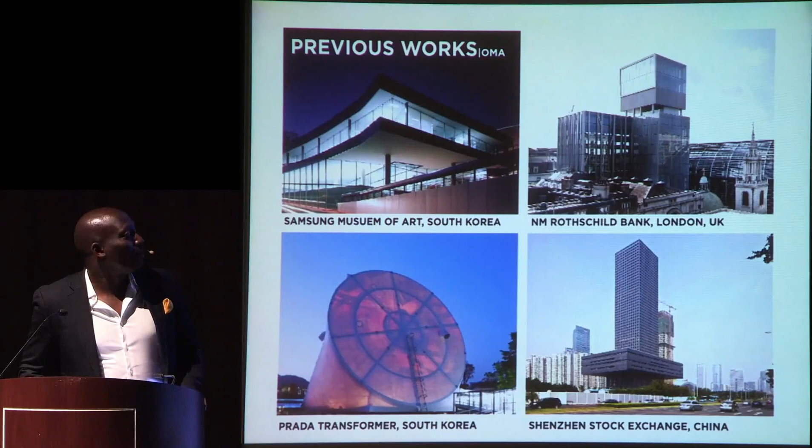And I think the home is a fundamental building block of every society, and so that's really what NLÉ is about. Before I started NLÉ, which was 5 years ago, I had the great opportunity to work on different projects, what I would call super sexy projects, all over the world, an incredible experience that I've been very grateful for.

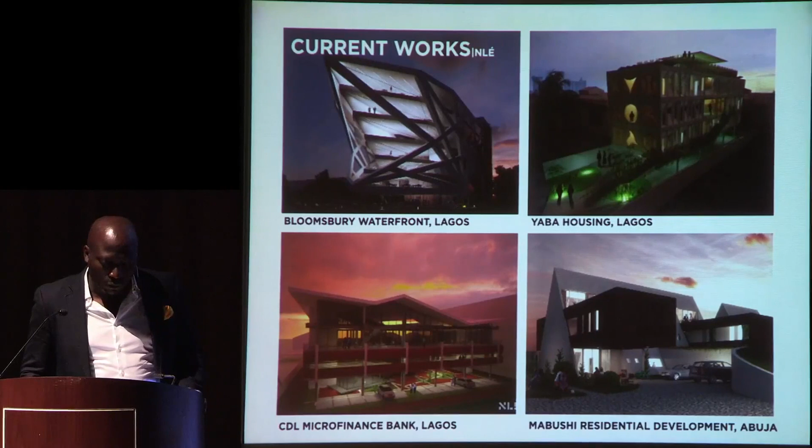At NLÉ, we continue to do super sexy projects. We're doing big buildings, fairly large-scale buildings in different parts of the city. But we are also very interested in a new breed of work, which I call the super sexy, serious projects. And I will show you some of those, 3 specifically.

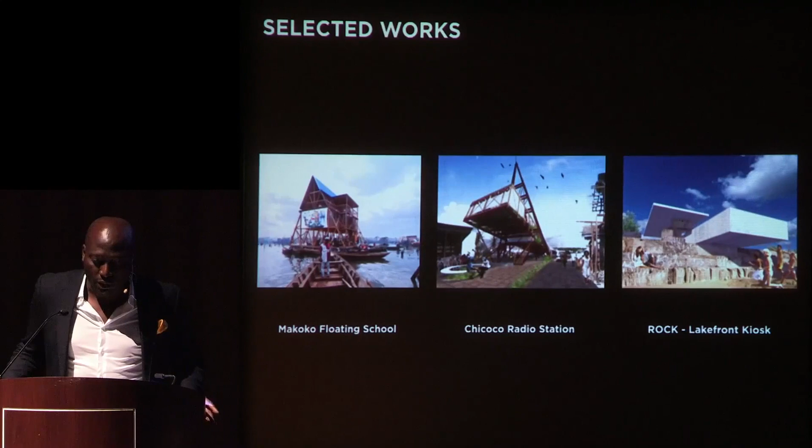The first is Makoko Floating School, which perhaps a lot of you know of. The second is Chicoco Radio, which is a radio station in Port Harcourt. And the final project is Rock in Chicago here. All of these projects, and the others we work on, exemplify a bit more of what we are and where our focus is.

It's about sustainable development, and not in terms of the checklist of sustainability that we all know from all those credit lists, but really about responsibility, and that sustainability is about meeting the needs of the present without compromising the ability of future generations to meet their own needs. I think it's a very eloquently articulated definition,

which is really just about responsibility. It's about economy of means, it's about a lot of things, and if you embody that in your work, in day-to-day life, then you'd be practicing sustainability at its core.

Like I started, I think urbanization is actually one of the great challenges of our time, and at the same time also a huge opportunity. We know now that more than half of the world's population live in cities, and it's said that by 2050, nearly 70% of the world population will live in cities. What we're beginning to see is that kind of agglomeration of people happening around the African continent, some of it in Asia.

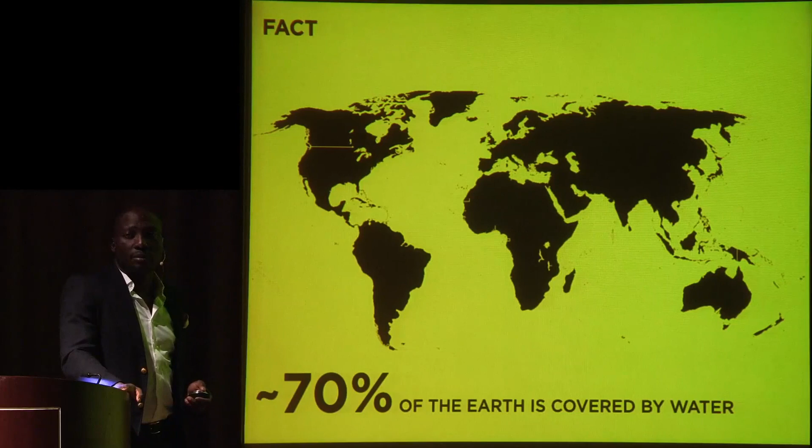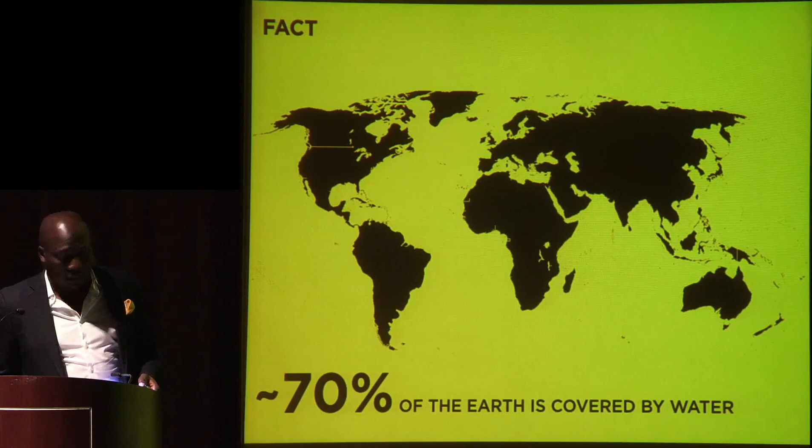But what's of course a fact is that the territory we're all struggling to occupy, these land masses, only covers about 30%. So 70% of the earth is actually covered by water. It's kind of interesting to know that we're only living on 30%, which is even far less because of the regions that are accessible. And what's even more interesting is that nearly 70% of the world's capital cities, the large cities that are rapidly expanding, are by water.

But more specifically, we found out that in Africa, where there's a lot of urbanization happening, again, nearly 70% of the African capitals are by water. So at this point, I actually thought I should write a book called Architecture for the 70%.

So it's no surprise that most of the cities are around water, because of course the cradle of civilization in Mesopotamia is a settlement on water. Water is a natural resource; you need it for agriculture, for transportation, etc. So that really is the basis, that there's a natural relationship between water and cities and humanity. But yet we seem to live on land and not turned into fish. It's quite surprising. But we will see some of that happening soon.

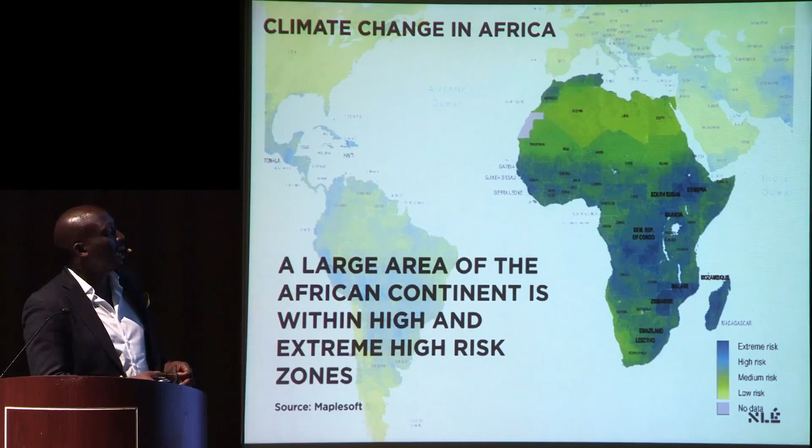So one of the first projects I would show, of course, is set in Africa's second largest city, in Africa's largest nation, and the world's largest black nation, Nigeria. And the growth of Lagos has escalated a lot in the last few years. It's currently 16 million people, and it's projected to be over 24 million in a few years. So it's quite interesting that you see the trend of growth in African cities.

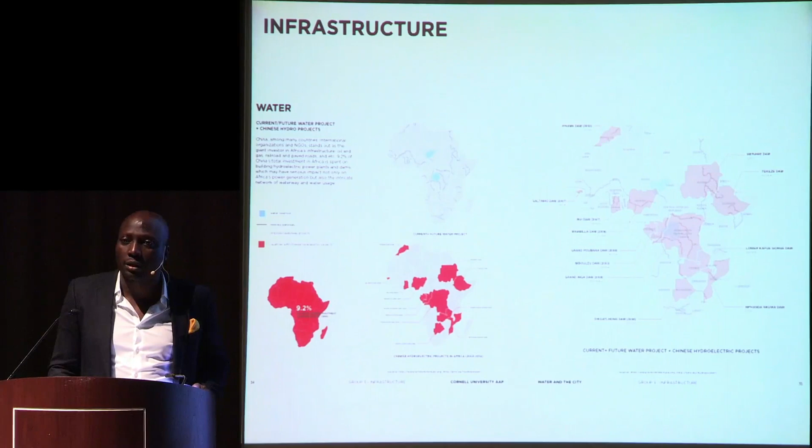Morphology of the city: where you have highlands, lowlands, where you have waterways, the kinds of constraints that prevent cities from developing, which in a way almost produces a predictable result. Cities almost grow organically if you look at them from a very macro scale in terms of their morphology.

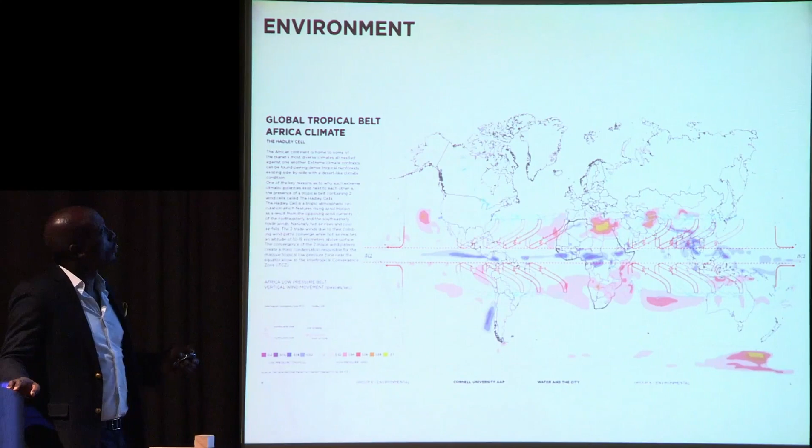The environment was quite interesting. Of course, one thing we know is that one of the most important parts of the globe is the tropical zone, the tropical belt, and that part is where there's a high degree of biodiversity and climate and rich resources. And Africa, of course, happens to have the largest area of the tropical zone of all the continents. And one of the things that we are beginning to realize is there's a shift in the intertropical belt. I'll get into that in more detail.

Resources, finally: a lot of emphasis has been placed on oil as a resource, and it's no news now the impact of consumption of oil and the trade and how that also has a direct impact on climate change.

So the result of that was really, first of all, an identification of what we call the top 20 African water cities. And these are cities that we identified as the points of convergence of issues of urbanization and climate change. So where are the cities that are growing rapidly and also most vulnerable to climate change? And these cities are points that we're now researching.

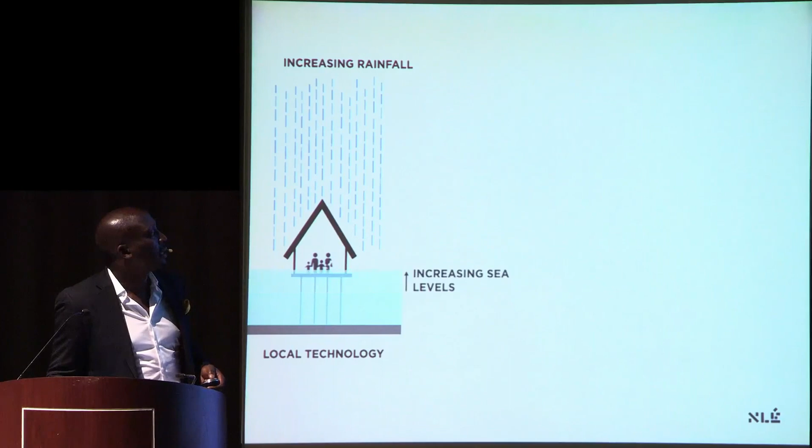But the soil condition is really poor, so once in a while, the buildings are sort of falling apart. And on the other hand, because of the increase in rainfall due to climate change, the houses get flooded from time to time. So we devised a solution that was, I would say, sort of a global solution that wasn't really an invention, but something that would adapt to the changing conditions.

And we decided to use almost everything about how they build, understanding exactly the materials, the techniques, and create a whole different structure that would work with the flotation device, essentially a hybrid solution of local and global technology.

While we were thinking of how to get the building floating, I saw these kids actually solving that problem. They've been doing it for years; literally anything they could find, they would use as flotation devices. And it occurred to me: hey, wait a minute, we're in Lagos, and they've got tons of barrels that are recycled because it's a port city. And the community also logs wood and brings it in, right within the community. It's a sawing community. So why don't we just use the local material, literally within 50 meters?

So we strapped a few of them together, and the kids jumped on it, and that was an indication of success. I couldn't even stand on it, but it's very interesting that their balance and adaptation to the environment is really peculiar, but once you get the hang of it, it's absolutely fun.

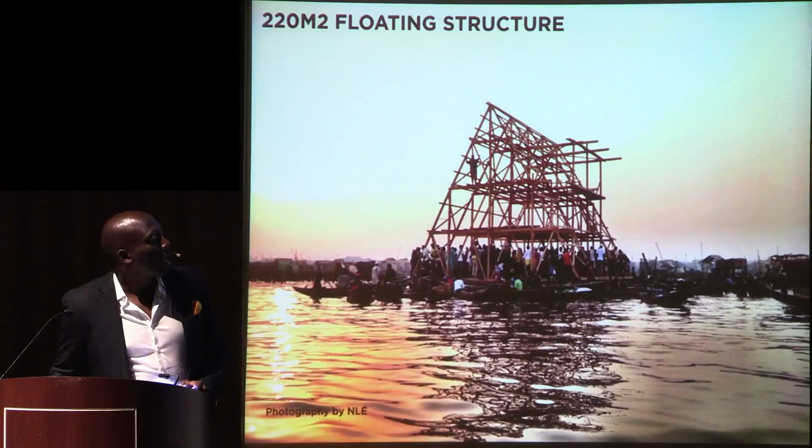So we strapped 16 of those together, multiplied that, and created sort of 220 square meters of floating real estate, and extended that into the structure using the wood, which again became their sort of party venue. And that's the structure there. I'll just go through very quickly.

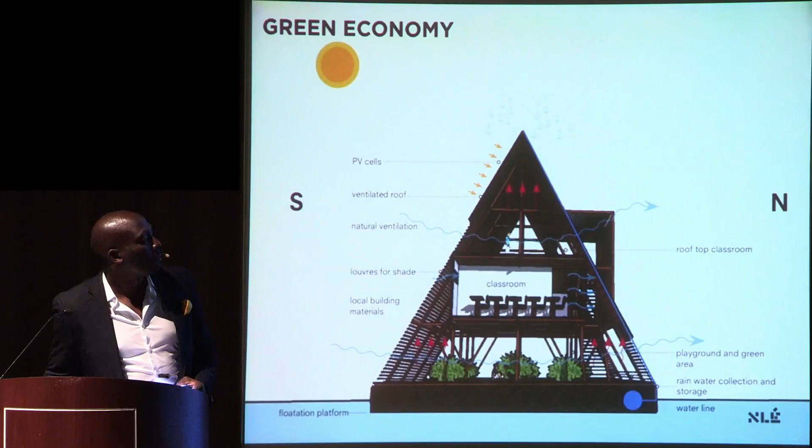I like to say it's a building that is really far from perfect, but actually makes everything around it perfect. It leaks, like most great architecture. It's become an interesting landmark for the community. It's the highest point where you see the whole city. It's the first 3-story building.

In itself, it's not like we've really invented anything new. Floating houses have been built all over the world. But the ability to think about the resources locally available, and the fact that this structure, not quite a house and not quite a boat, is 3 floors, 220 square meters, built out of local materials by 8 unskilled carpenters from the community, using nothing more complicated than a hand drill, I think is perhaps remarkable.

So the impact, of course, we've provided a space for the community, but one of the most important things is that due to the global interest and international attention it's received, there's a lot of visibility and media attention, and we thank all the press people. The ability for the world to appreciate the work has also had a sort of catalytic effect.

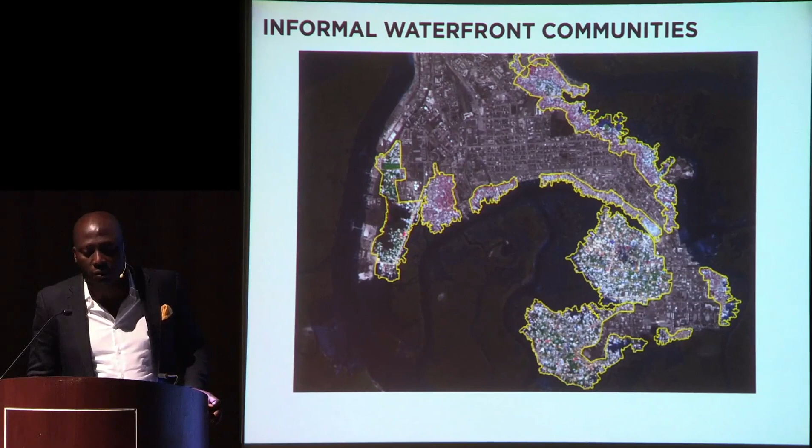The people are well educated and experts, but they also live in informal settlements called Okrika Waterfront. And a few years ago, some of the settlements were demolished by the government with this pressure of urbanization, that we need to develop, we need to create new places, new spaces.

I'll go very quickly. It's also a culture that is about water, but they're a very different culture in terms of they don't really live on water, they live by water. And I'll show you a video very quickly. This video sort of demonstrates.

You see this place where they are? Now water before. Where our papa them come down and fisher people. They can't carry this mud, big mud, come stone here. As you see this house, it's deep inside the ground. All here now money they take by, all here now mangrove. Then cut them. This place where you see so. Now here they born me. Now here my mama and my papa marry stay born me. And here she died. We carry her go that way, go bury her. As you see me, I done it 56 years. These 56 years where I did so, I never go any other place. Now here, even another town, I never go, not any place. Me, I'm from this place. So these are some of the community members. I don't know whether they want push us to the way here. We don't know. If they want carry us to the way, we don't know where to go. Me and my picking them.

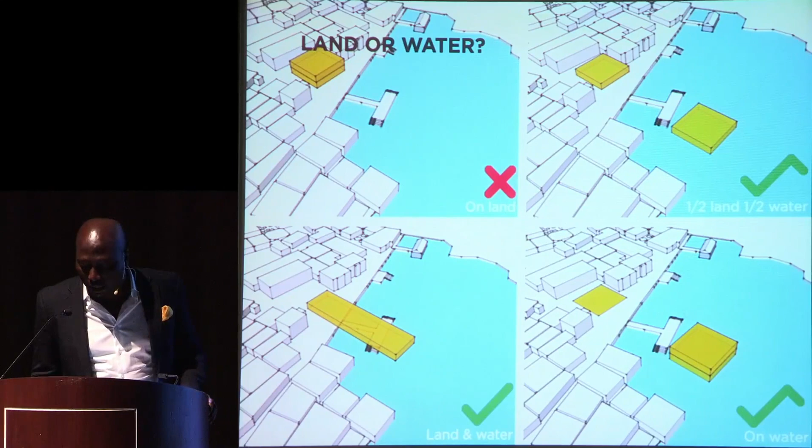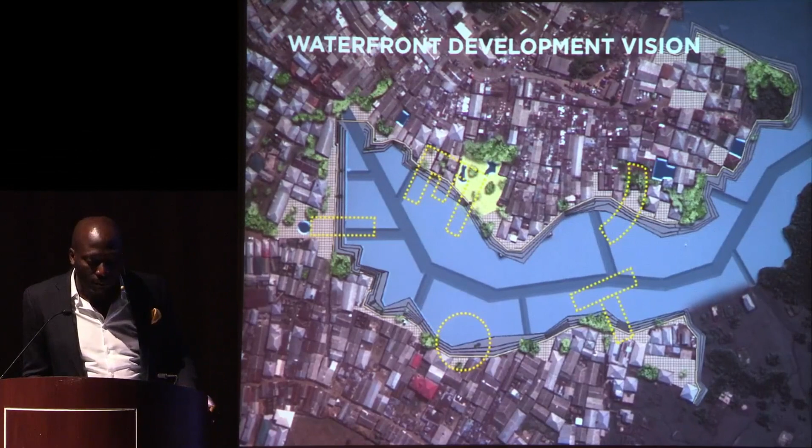So it immediately became a project that was more of an amphibious structure, partly on water and partly on land. And the thought was, why don't we use this as a model for urbanizing their waterfronts, where you create public spaces all around the edges and freeze the edge to make it a public platform.

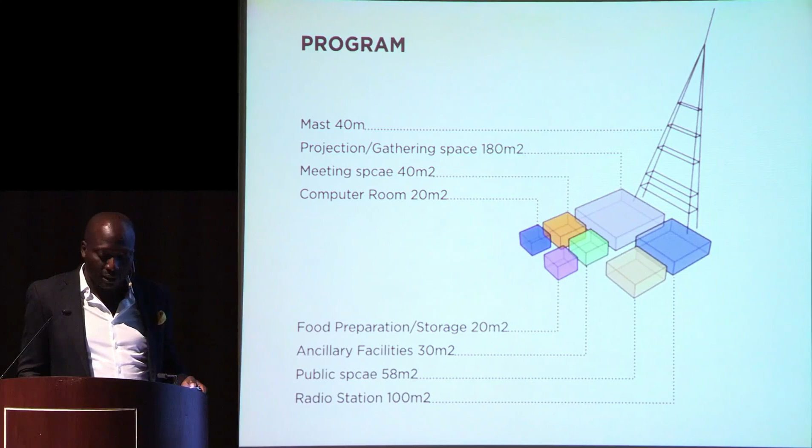So we looked at the program very quickly. We developed it with them and with CMAP, and part of the program was to also build a 40-meter mast. And we decided to organize the program in a linear way to match this relationship between land and water.

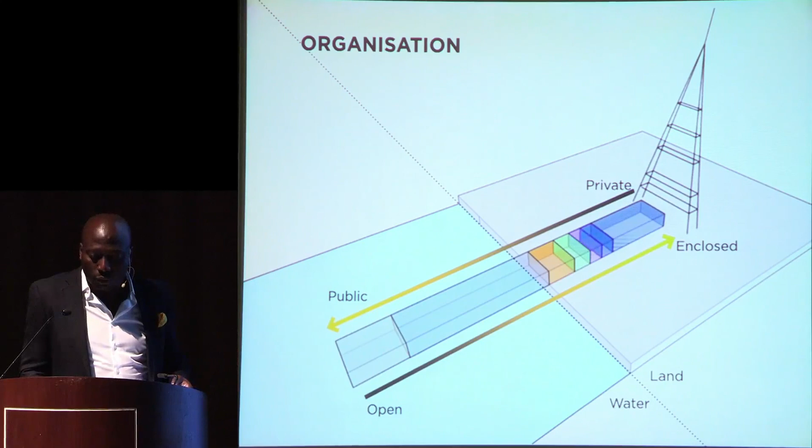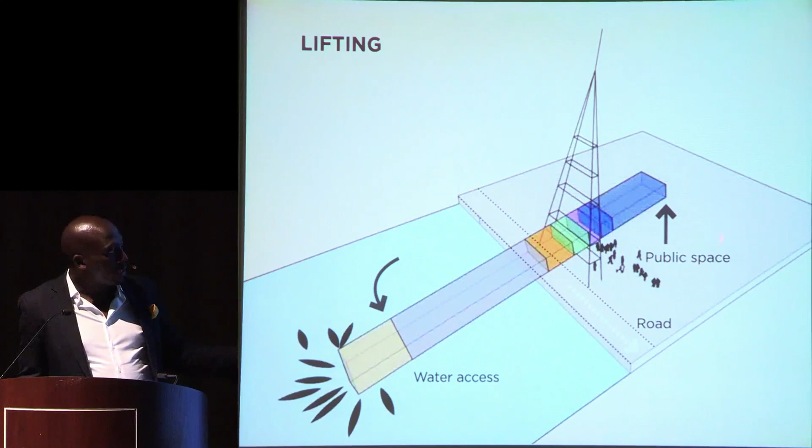And since we're going to build a mast anyway, we extended that to use it as a harness, to mobilize it as structure, to lift the element above the street, and to create public space underneath. So that mast became the structure that would sort of hold a very lightweight timber space, timber frame to create

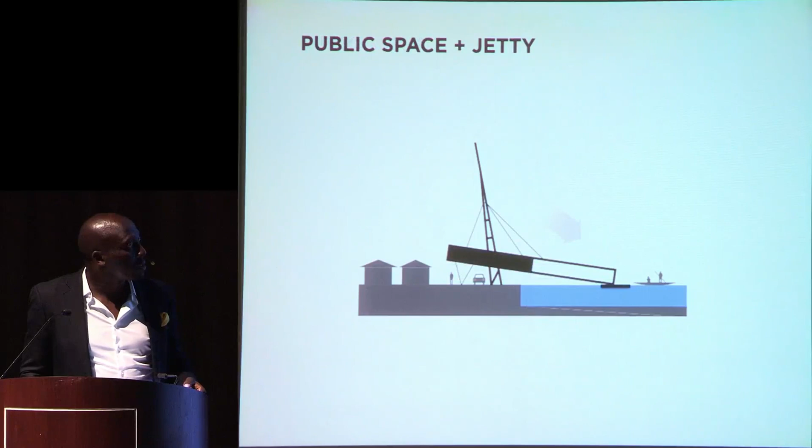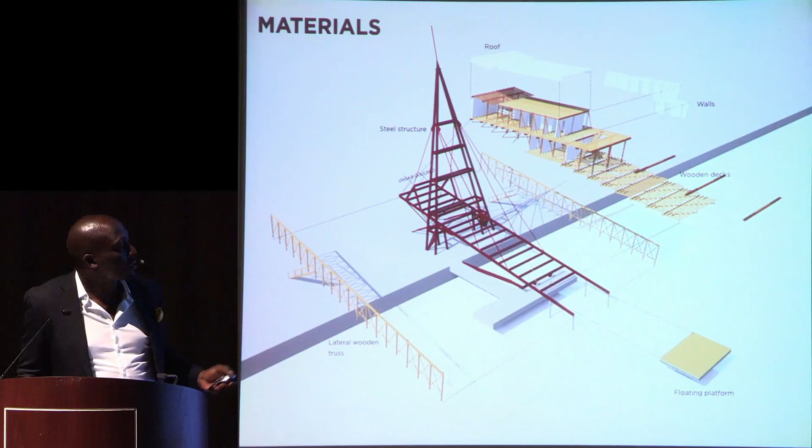a radio station. So essentially it's just a mast that is suspending this element, and that has a platform, so creating shade over this, and has a platform that adapts to the changing conditions. So the more important spaces are away from flooding. So the structure is a lot more ambitious than Makoko, but within the environment, it's much more possible.

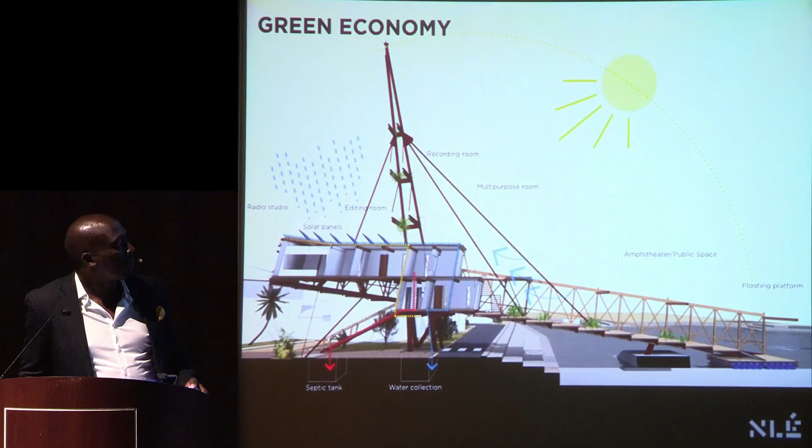So they actually did this jingle.

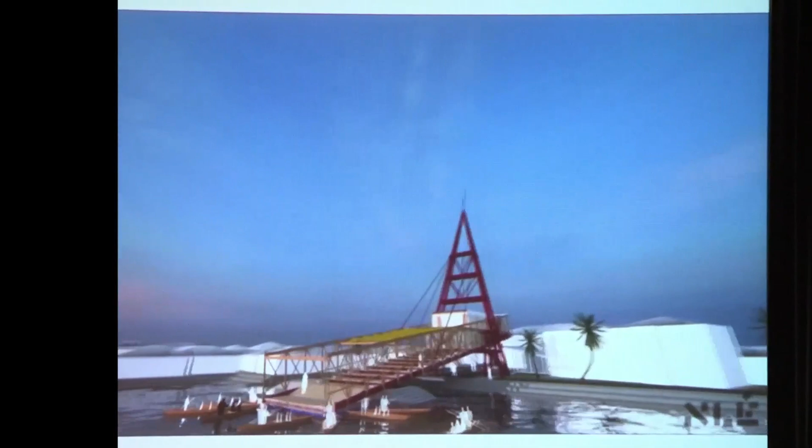For news, sports, music, live streams, and discussions. Oh yeah, don't touch that dial. You're on Chicoco Radio.

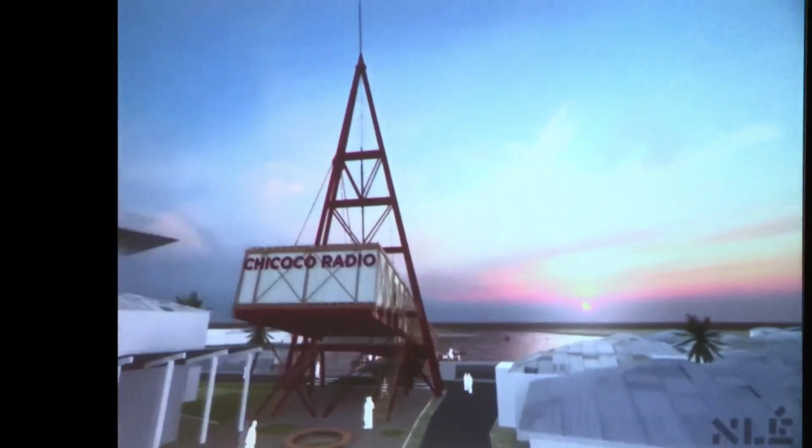Our voice. So the radio training has actually begun, and the community is very excited. CMAP is raising money, so if you go to their website, do not hesitate to click that button.

The final project is ROC, an opportunity that we received from the Chicago Biennial to be a part of Chicago, this wonderful city. And I will take you through it very quickly. This is the model sitting there, and we have it also at the Cultural Center. Set in, of course, the city.

Chicago is a particularly interesting city for me in terms of its architecture. The fact that it's a city that has developed modern architecture. It's like an architecture heaven in most parts, and the industry of prefabrication and all kinds of technologies for building is actually quite advanced. So we're not quite talking about Makoko or Chicoco or Krika here. Yet, for me, it's an opportunity to still think about these issues from the same principles.

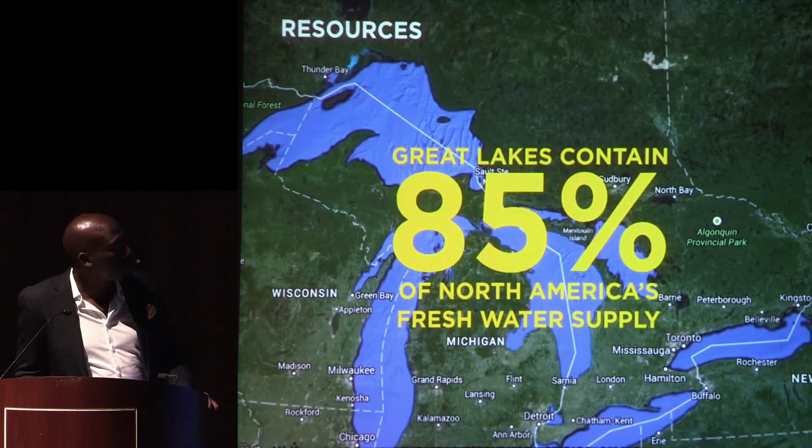The project is supposed to sit at the lakefront of Lake Michigan, which of course contains a large percentage of the freshwater supply in the States. At the same time, it also is a region that is subject to harsh weather conditions. The cultural landscape of Chicago is incredibly interesting and diverse. And this is our site on Montrose Beach, where of course, it's a melting pot of all kinds of cultures, people getting married, and people having barbecues.

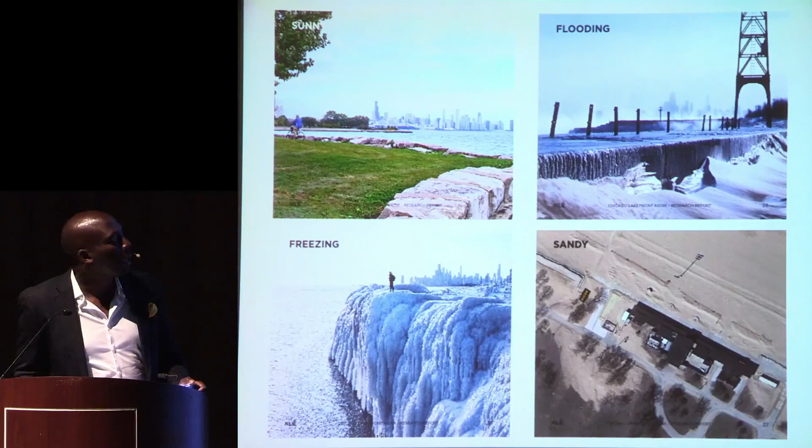And the weather conditions of Chicago, for those of you who live here, I'm sure you really understand that you have extreme conditions, to say the least. So it became very evident that whatever we did, which started out as a very modest request from the biennial to just do a really simple kiosk, became for us something that needed to be a lot more robust and resilient. And then we began to look at the environment itself, like what really lives on that edge, what really lives on that lakefront.

And we, of course, looked at the condition, and we found a lot of these sort of revetments, limestone blocks that were brought from Indiana in the 1930s to create this shoreline protection. And a lot of them have now been taken out because they've been replaced by concrete. And they've been actually stored in a place in the south side of Chicago.

And we also realized that some of the community in Chicago have been asking what can we do with all the limestone. So it's actually a resource that is just there, almost abandoned, but could be put to good use. This is our fine model and collaborator showing the potential of this great resource. Thank you, Douglas.

And we also looked at what we could do with limestone and other materials, or the idea of repurposing materials in Chicago. And the site, of course, how people use it, and the relationship between man and material, that even though it's a very raw material, it's still a place where love can exist.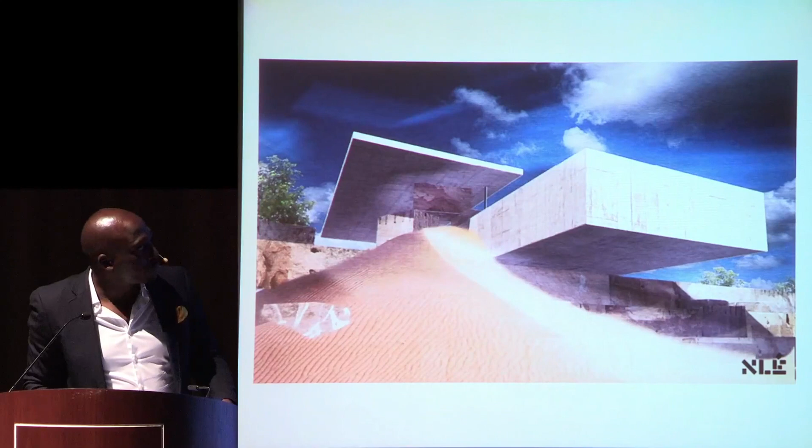We imagine it as a location that is also beyond sort of, it could be a bar, it could be a place for concerts, and also a condition where you can completely see how it reacts to extreme weather conditions, whether it's the sandstorms or the rain. And perhaps one cool thing about it is that actually, it all just really, it's in a box.

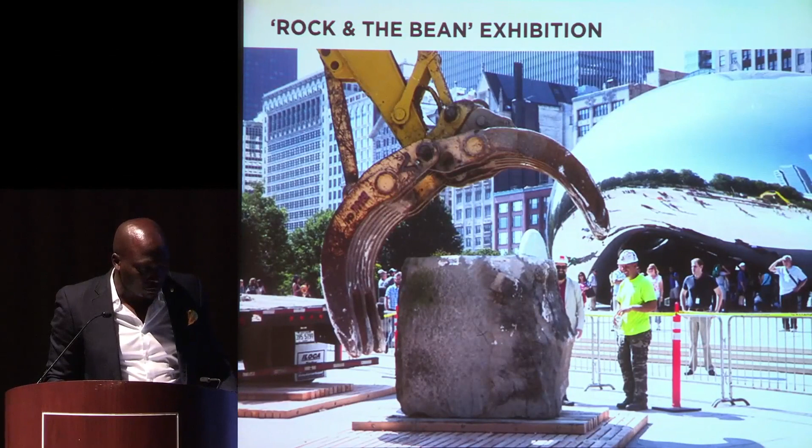So we didn't get the opportunity to have it built. It would have been wonderful to have it ready for the biennial. We had some permitting issues that had to be sorted out before the end of the year. It was going to be built early next year. So what we decided to do was to actually move the limestone rocks from the depository on the south side and take them on their sort of journey towards Montrose Beach. And the halfway stop point is Millennium Park.

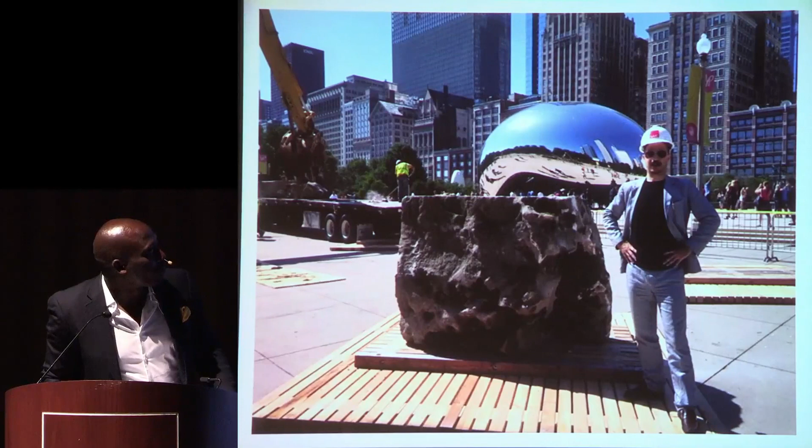So they've been placed in Millennium Park, where we also have our next model. And so they're at Millennium Park now on display as an exhibition, but also as a place where we want the public to begin to interact with the limestone and begin to act on them, to build this relationship. We're going to be running a number of programs where we want people to come and carve them, write on them, paint them, do all kinds of things.

On Saturday we had sort of an opening event where we had a performer in the center and students. She was spinning for an hour. So we kind of imagine things like this. This is temporary, but we're going to get artists that would facilitate workshops with the public to begin to put marks. Please go there and make your mark on the rocks. And the idea is that they would be moved to Montrose Beach and become part of the kiosk in spring of 2016.

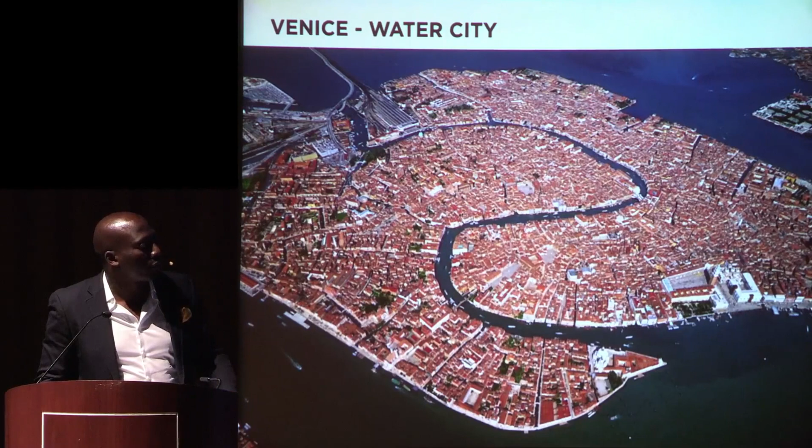So finally, just to conclude, the thought of all of this is looking at all these kinds of cities, whether it's Lagos, a city on water. What we've learned from Lagos: Lagos is not the first city. We know Venice is a great example of cities on water. We understand the challenges and the opportunities in Venice. What's interesting is that the first settlers of Venice were no different from the people of Makoko. They're called the lagoon dwellers. Cities like Amsterdam, and of course a city like Chicago. How can we learn from all these cities and begin to produce a new condition?

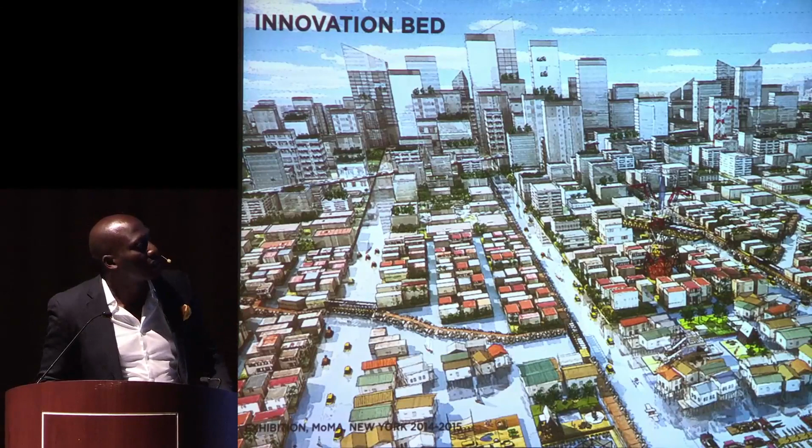And imagine, what if we begin to think of a space where all these kinds of conditions exist, an innovation bed where we develop sustainable, responsible, high-rise, dense buildings where they need to exist. And as you get into the periphery, you become much more fragmented and respond to the environment, create recreational spaces, lower structures. And as you get away from the edges, you can have even recreational facilities. You can finally have your swimming pool.

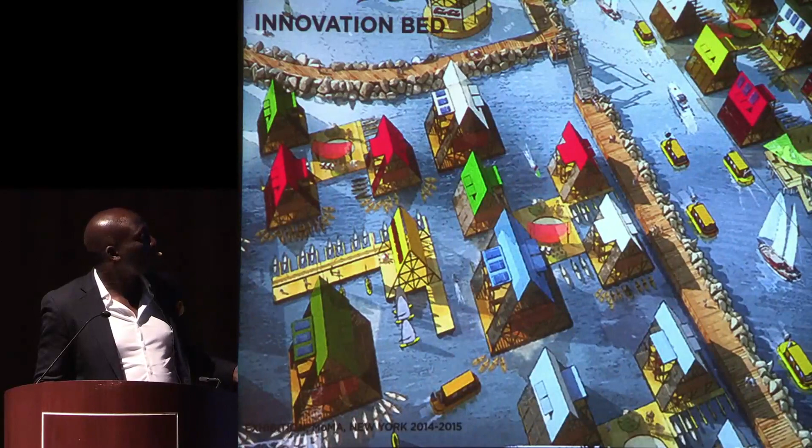You can have play areas, green areas, agricultural areas, transportation, and essentially create a new type of architecture and urbanism on water for Africa and for the rest of the world.

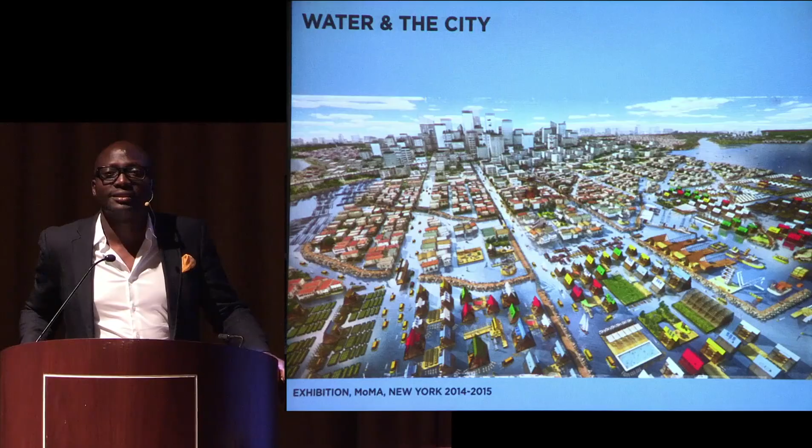Hi. I noticed at the beginning of your presentation that you made a point of punctuating that NLÉ is a business practice instead of a nonprofit or NGO. And my thesis research here at SAIC was on emerging business models and how creative organizations can use them to create financial sustainability. So I'm curious if you can tell me a little bit more about your decision to pursue specifically a business model and how that might impact the public's perception of what you're doing?

It's a very good question. I haven't really thought about it a lot, but all I know is that I think it's important that the result of the work that we do actually has some surplus to enable us to do more. That's all I know. And I think we're always looking to apply that. We're trying to grow, not necessarily as a business itself, but really the body of work that we produce, and it requires.